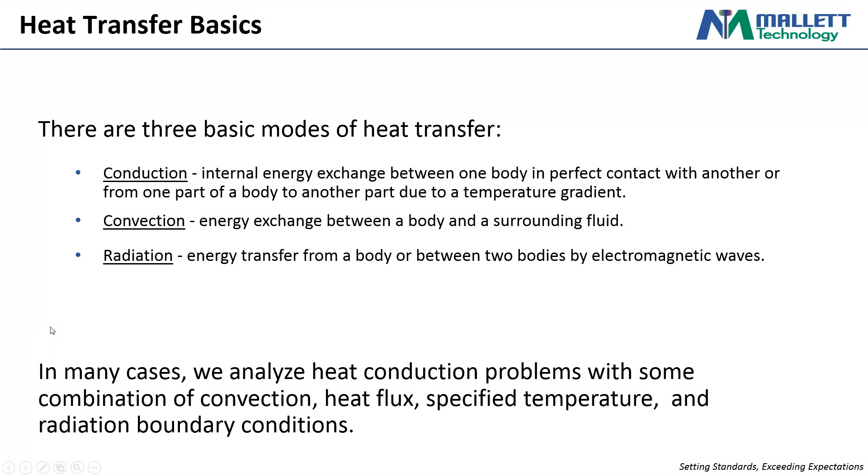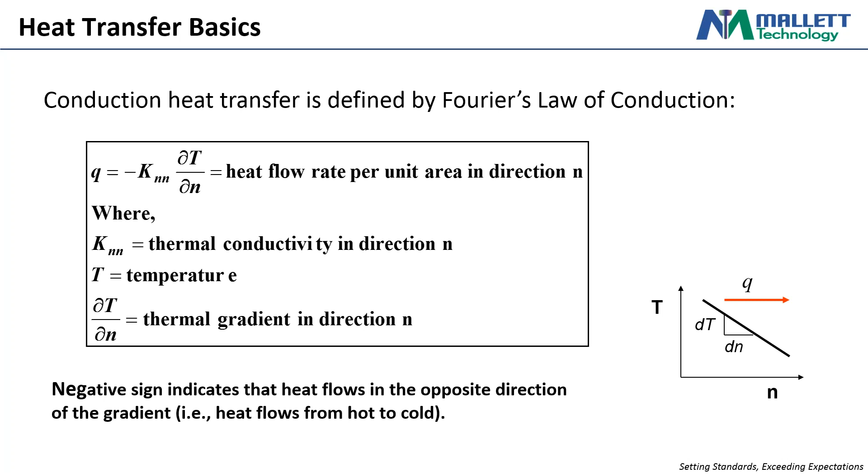So just some heat transfer basics. Conduction is defined as the thermal conductivity times essentially the change in temperature for a given direction. The one note here is heat transfer conduction flows from hot to cold. We can represent this as a thermal resistance, which is equivalent to length divided by the thermal conductivity of the material times area. This is oftentimes us simplifying a system to something equivalent, let's say an equivalent circuit diagram - this is how we calculate the resistance of a given material.

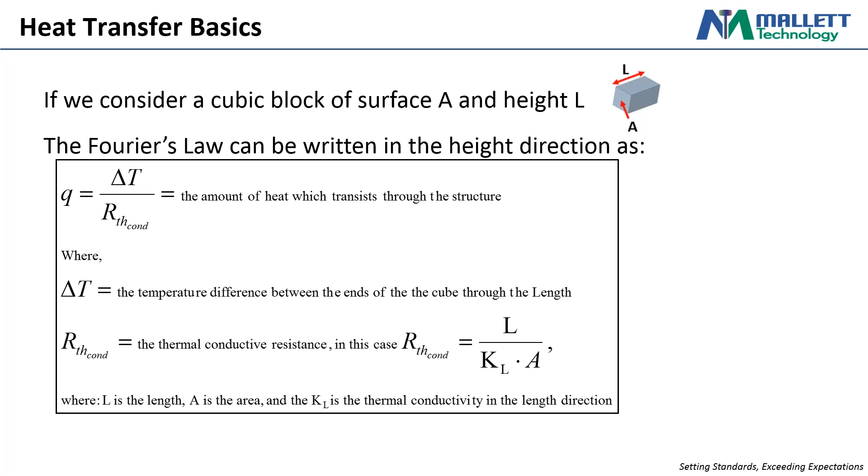And then we have convection. Convection is transfer between a body and a fluid.

The big piece here that can oftentimes be challenging to determine is the convective film coefficient, H. This is not a material property inherent to materials. This is a coefficient that depends on a number of factors.

If we're talking free convection, that's where you don't have forced air blowing over a system. Then it's dependent on the geometry, the orientation of the geometry, and the difference between the body temperature and the fluid temperature. There's also forced convection, which depends on the rate at which the fluid is being forced over the body. Once again, it depends on geometry and all these different factors.

So generally, a lot of the problems I'm dealing with on a regular basis are usually free convection. It's usually, let's say, an extrusion press that's just hot because it's having to make metal malleable. So oftentimes there I'm looking at what's the free convection on external surfaces, and there are ways to do this. ANSYS has tools that automatically calculate this based on a number of assumptions. But generally, I like to assume, if I'm dealing with natural convection, it's almost always going to have a

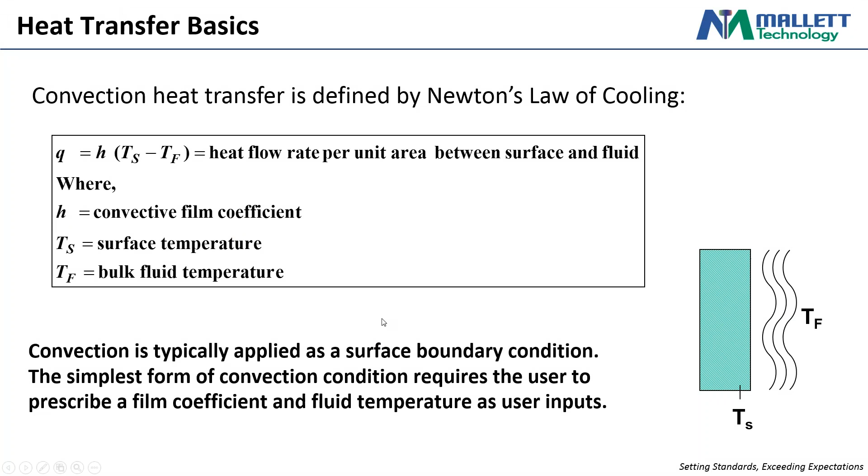And then last, radiation. Radiation is inherently nonlinear because of this T to the fourth term. So this is just radiation from a body. All bodies radiate heat.

So the key here is the Stefan Boltzmann constant, defined automatically in the software. Emissivity is what we as a user would define in the software. Everything else, ANSYS is automatically going to calculate. So when we're looking at emissivity, that's just the ability of the body to radiate energy well. Essentially, as you vary emissivity, the amount of heat that's radiated from a body is going to increase or decrease.

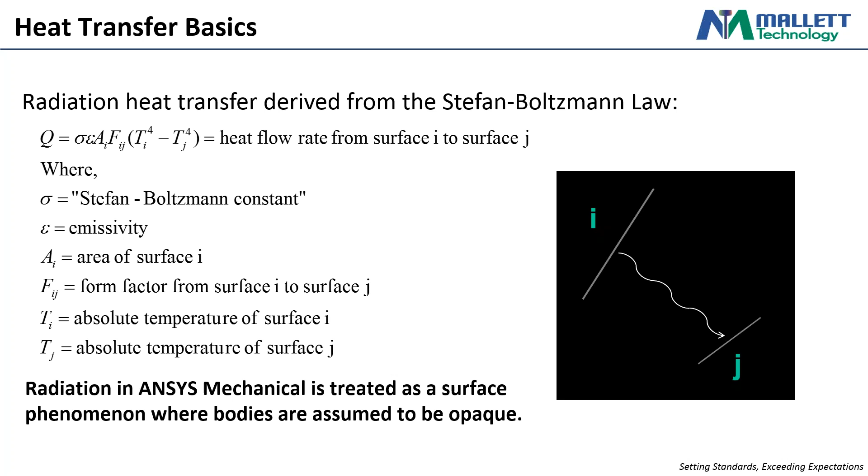ANSYS deals with radiation particularly on the surfaces of bodies. It's not necessarily interested in any internal behavior of the body, only on the surface or from surface to surface. I'll show you how to set this up. You can set it up between bodies in an enclosure, so bodies radiating to each other have different emissivities, radiating to external temperatures, all that stuff.

Okay, so just continuing on with the basics. From a first law of thermodynamics perspective, we know that to be able to solve a cohesive thermal problem, essentially our energy stored plus our energy in through any boundary plus energy out through any boundary plus the energy generated has to equal 0. If this does not hold true in your analysis setup, the analysis is not going to converge.

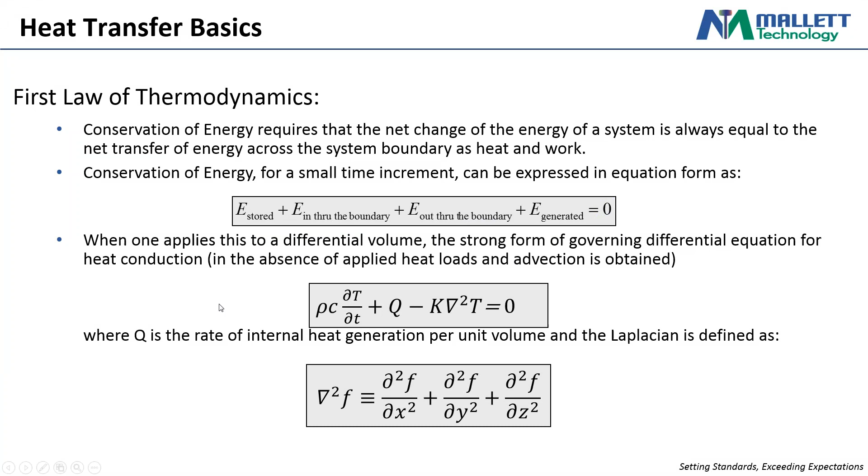I'm not going to go into more detailed math here. So potential problems of thermal analyses, this is really just generalizing the most often encountered. The first and foremost is potentially the simulation could just be poorly constrained.

So if we look at, let's say, a static structural simulation, we know that all translational and rotational degrees of freedom have to be constrained to solve that problem. So the degree of freedom that thermal analyses deal with is temperature. And so we have to have temperature constrained somewhere in the problem to allow that to be solved. If it's not constrained, that's essentially equivalent to rigid body motion.

So the big deal here is just make sure, if you're running a thermal analysis, that it is constrained. If you're having errors, check that it's constrained. If it's not, add a constraint, and a constraint doesn't necessarily have to be a set temperature. It could be, let's say, a heat flux out of the body, but there has to be some boundary that allows heat to leave the system. Because otherwise, you can imagine if you have heat generated in a system and there's no way to leave, the heat is going to continue to increase into infinity, and it's not going to be able to be solved.

The next potential problem is large thermal gradients or flux singularities. Let's say you had a point heat source, similar to a point load in a static structural simulation. At that point, you're going to get infinitely increasing temperatures as you refine the mesh.

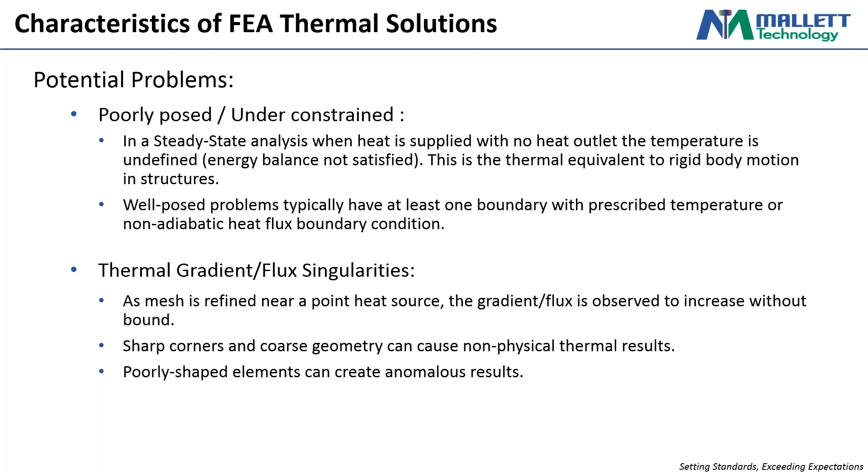Briefly, I'm going to touch on what geometry types are supported in thermal analyses within ANSYS. The long and short of it is all geometry types are supported, but there are a couple different considerations to make when dealing with certain geometry types.

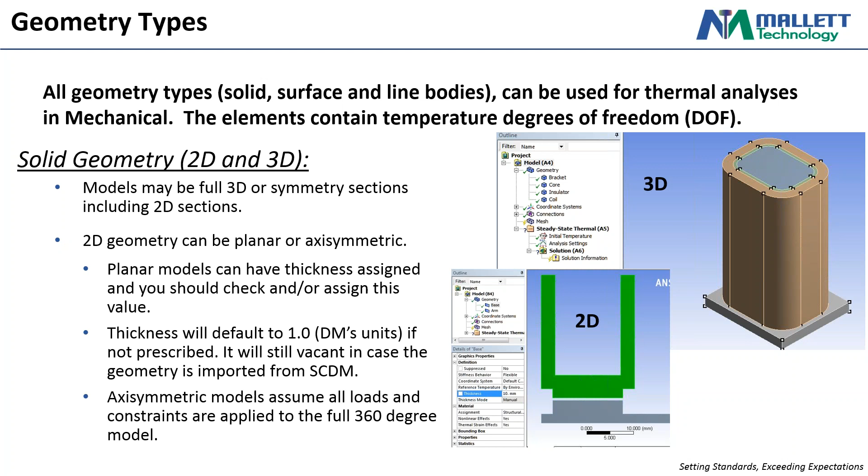Both 2D and 3D are supported with regards to shell elements. If you're using shell elements in a thermal analysis, the solver assumes a uniform temperature through the thickness of the shell body. You do get changing temperatures tangential to the shell body, but through thickness, the temperature is going to be constant.

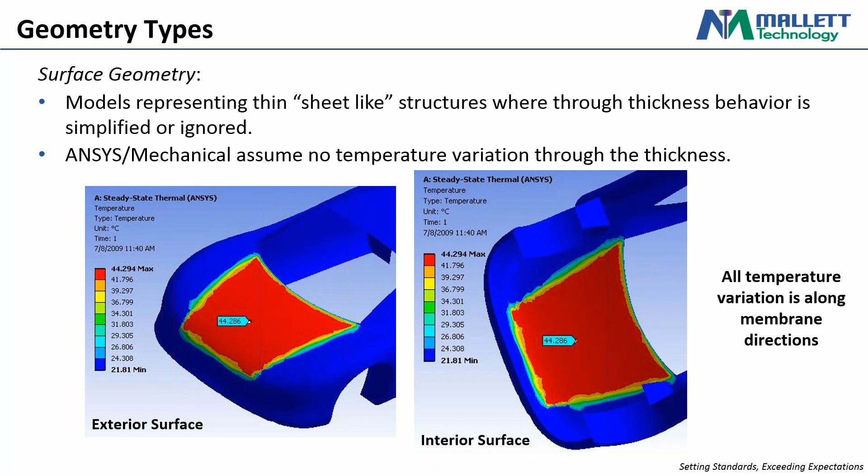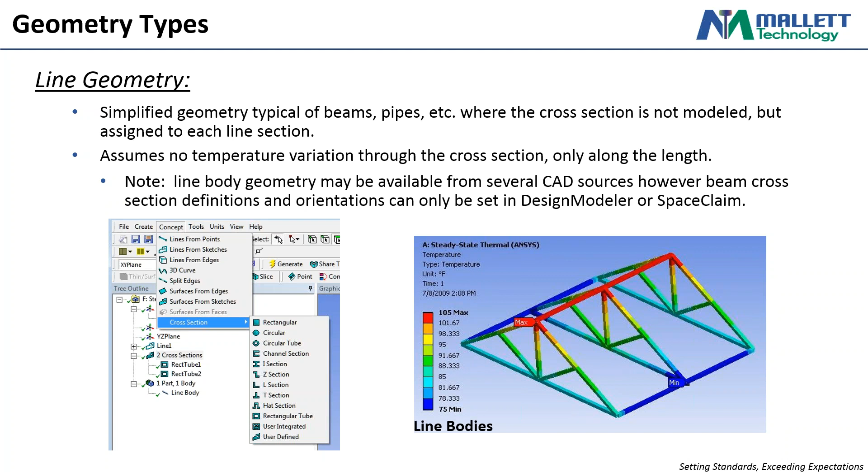The same is true for line geometry with section properties assigned, so beam or truss structures or anything along those lines. Essentially, you're going to get change in temperature along the line body, but not through the section of the body.

So then let me touch on how contact is dealt with in ANSYS's thermal analysis. Essentially, if something is in contact, contact is defined as inside or outside of the pinball. Inside of the pinball, it's in contact. Outside of the pinball, it's not in contact.

If it's not in contact, you're going to get no heat transfer taking place. If it's in contact, you're going to get conduction occurring, and depending on how you set it up, it could either be perfect conduction with no resistance at the contact, or you can insert some contact resistance to make the problem more realistic.

You can use any type of contact from bonded to no separation, rough, frictionless to frictional within the thermal analysis. Generally, the reason you'd see these types of contacts included is if you're leveraging the exact same model setup for a thermal analysis as a structural analysis, then you might want to use frictionless or frictional or rough in place of bonded.

If I have a thermal analysis that I'm not directly using in a structural analysis, there's essentially no need to use any of the last three. Usually you just use bonded no separation because you're essentially just telling the solver, hey, there's conduction at this interface. It's just when you want to share a model setup that you'd use more nonlinear contacts.

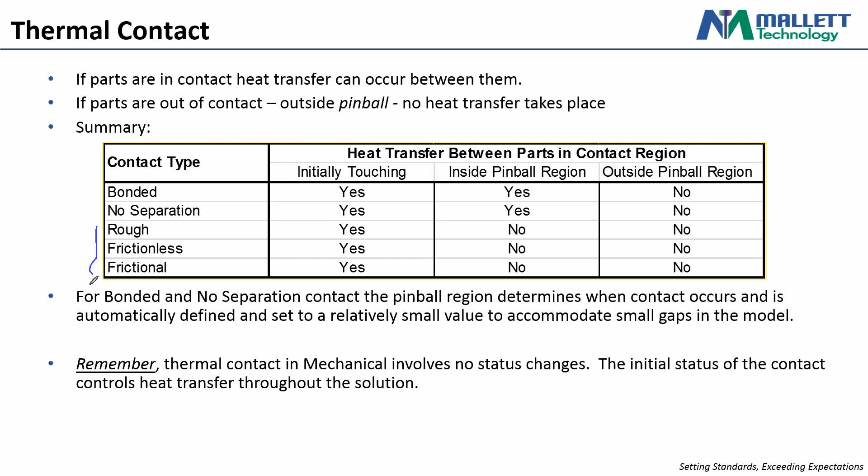So this is what I mentioned earlier: whether or not there's conduction just depends on the size of the pinball. As we get away from the pinball, if the geometry is further apart than the pinball size, we're not going to get conduction between these nodes. But when it's within the pinball size, we will get conduction in this area.

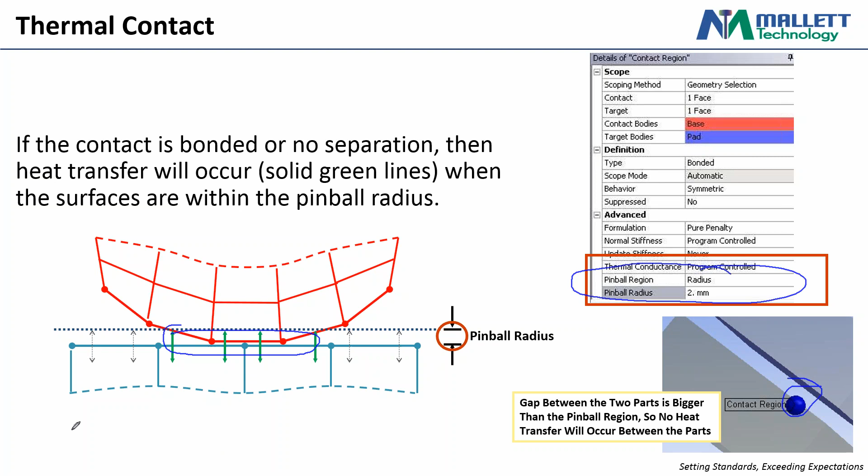The pinball is always automatically generated. If you want better control of your model, you can go in and manually specify the pinball, and then you get this blue sphere that shows you the pinball size that you're recommending, or telling the solver to use.

Okay, so from thermal contact resistance. Thermal contact resistance is pretty common. It's a safe assumption for a welded contact not to have thermal contact resistance because you're essentially joining material together, or if there is resistance at that weld, it should be pretty negligible. But everywhere else, it's fairly readily assumed that there's going to be some amount of resistance, right?

Resistance can be from a number of factors. If you don't have a flat surface, you're not going to have perfect conduction across that interface because conduction will occur across the peaks of each side of the interface. Same rationale for the finish. Oxides potentially could induce a surface material that is more resistant to conduction. If you have fluids in the center, that's another thing to conduct heat through. Contact pressure - higher contact pressure, you're going to have better conduction; less contact pressure, lower conduction. You can imagine if I have an infinite amount of pressure at an interface, that's essentially a uniform material at that point, because you're compressing the material until it's perfectly flat and perfectly meshed with the opposing material.

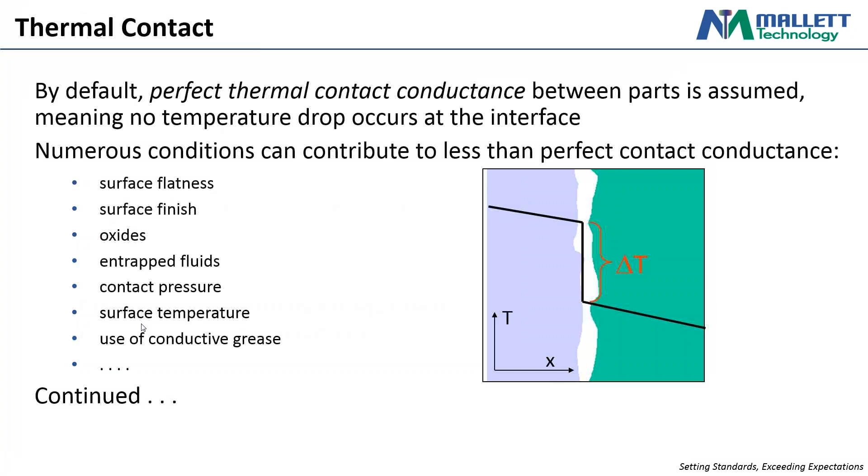If you use the bonded contact setup, there is a thermal conductance value that you can specify for a particular bond. This is essentially the same as thermal contact resistance, just requires you to modify in terms of invert and divide by that area to get thermal resistance from the thermal contact conductance.

The one note here is to have this thermal contact conductance value available, you cannot use an MPC contact formulation. MPC is similar to shared nodes, and essentially it creates a formula saying that the two different sides of the contact must change together. So there's no option there to have a delta T, or temperature drop, across the interface. Just make sure if you're trying to find this, you're not trying to use MPC contacts.

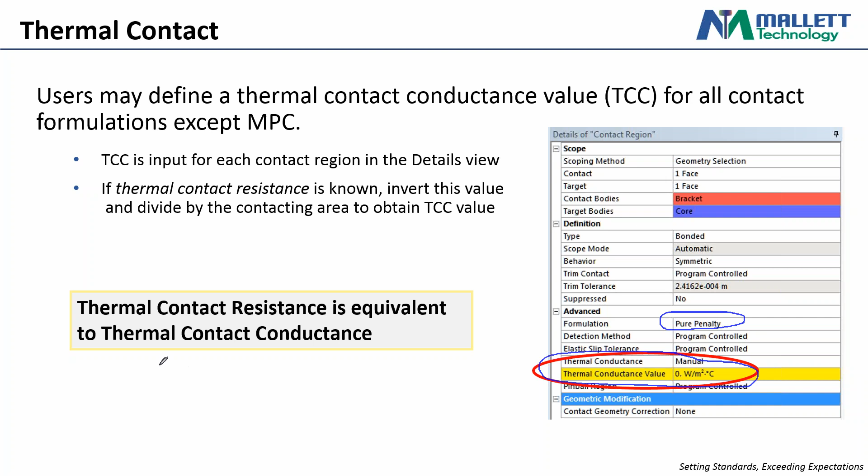Okay. So those are all the basic slides, and then I set up a couple examples that I just wanted to walk through in terms of the setup and then potential considerations.

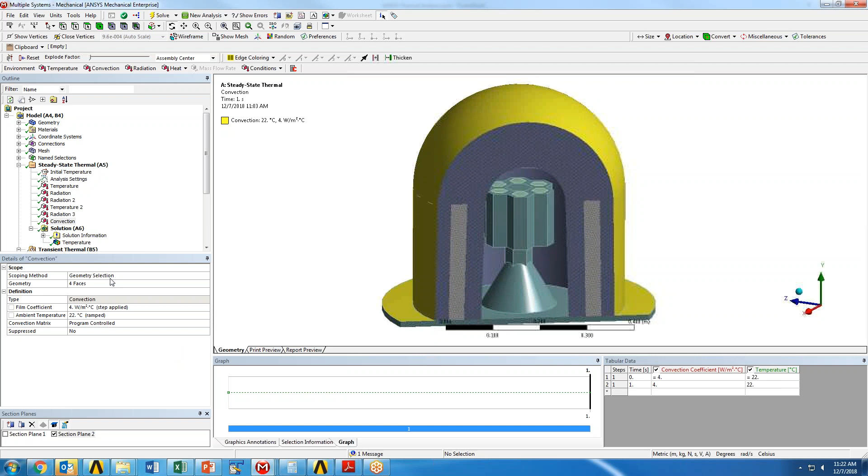So let me look at the workbench workflow first. With any thermal analysis, you can always transfer those results into structural analysis. It's really easy, really straightforward. All it looks like is you have your thermal analysis - you're going to grab this solution branch and then drag and drop it to the setup.

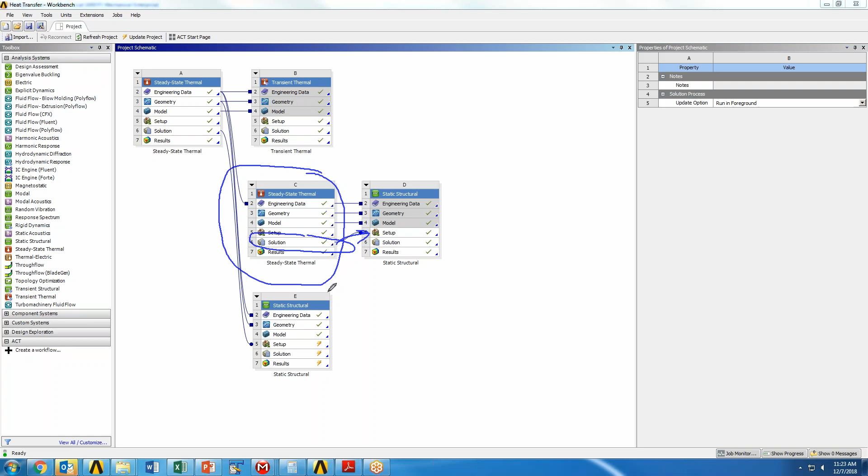What that's going to do is allow the structural simulation to say, hey, I have some load coming in, I need to be able to import the body temperature that's specified. So you can import that, and what the structural solver is going to say is, okay, I have this temperature distribution on my body, and as long as you have a material property value of coefficient of thermal expansion for each material in the domain - which you have to have if you're going to have temperature or thermal loads applied - it can use the thermal expansion coefficient values to calculate resultant stresses from the applied temperature.

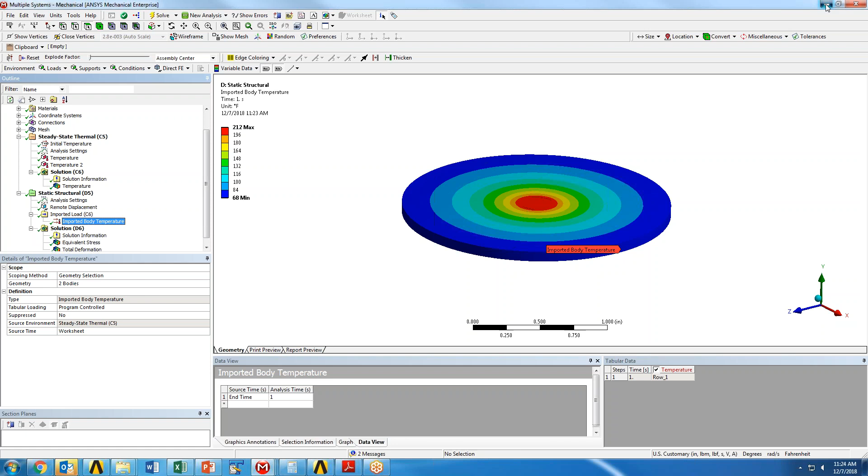Okay, and you don't have to fully share models here. I'll show you a little bit later that I have similar geometry but completely different meshes, and you can still transfer thermal loads from a steady state or transient thermal analysis to a static structural or transient structural analysis.

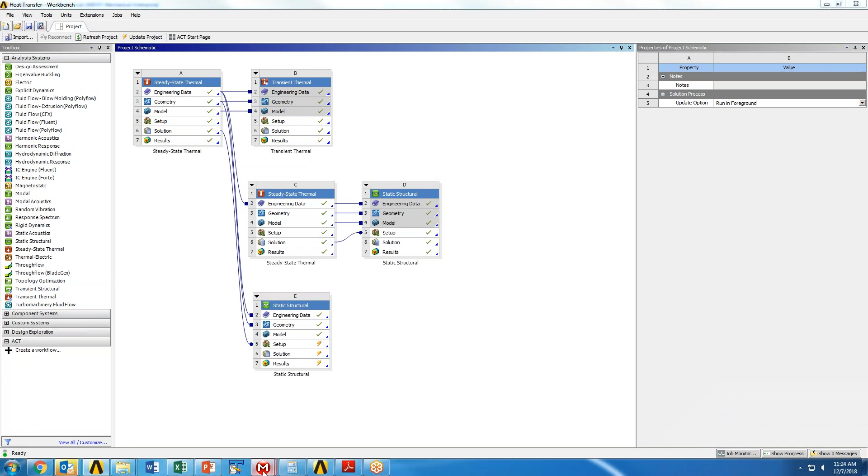So this is just a dummy analysis I set up. This geometry is essentially meaningless. You can see I essentially just have some weird looking standing body inside a dome. There is mica insulated material on a portion of the dome, while the rest is just structural steel. And then I have just a plate on the bottom that everything's resting on.

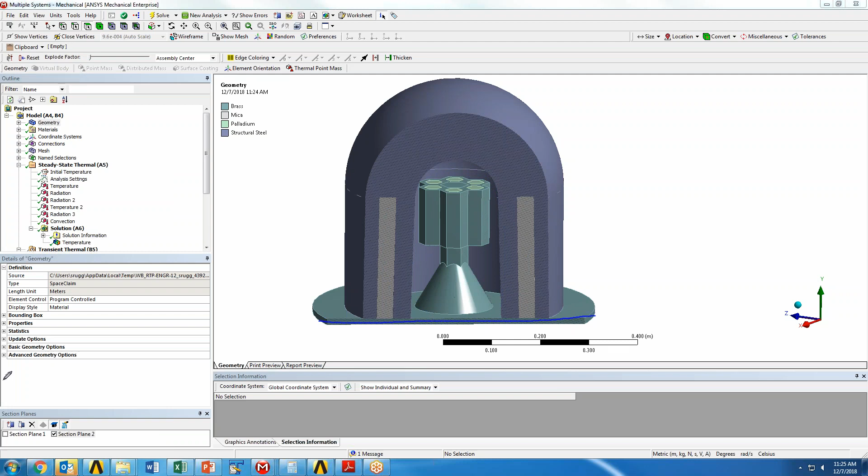So the one thing I'll call out before going into applied boundary conditions is another option, right? So you have two options when talking about conductance and getting heat to transfer across interfaces. The first is kind of what we've talked about in the slides, which is you can use contacts to specify two bodies transfer heat to one another.

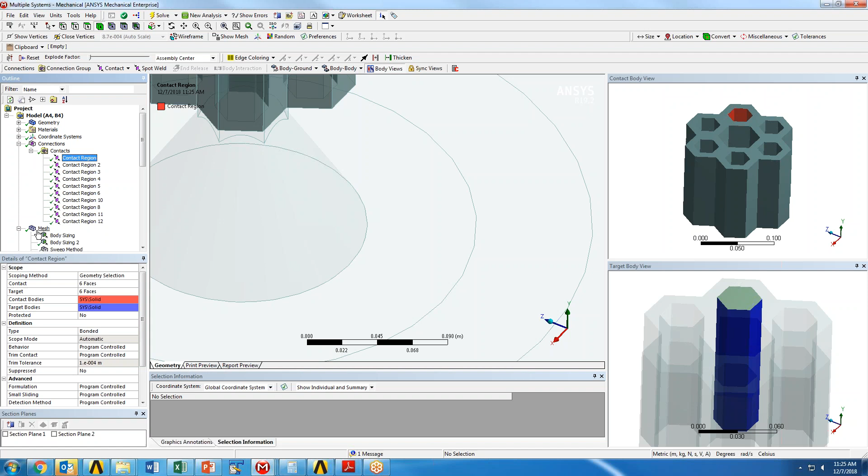The second option is to use shared topology, let's say within SpaceClaim. Shared topology tells ANSYS that when it meshes the interfaces, it has to use shared nodes across that interface, which is what I did at this interface between this cone and the plate. You can see all those nodes are shared.

This essentially allows you to get really good temperature distribution across an interface. However, you cannot at that point specify any type of contact resistance, so that's the drawback. But if you're convinced that you have really good conduction, then generally I recommend shared topology as much as possible. Partially just because it simplifies your model, it simplifies the structure tree, and generally something simpler, there's less risk of error.

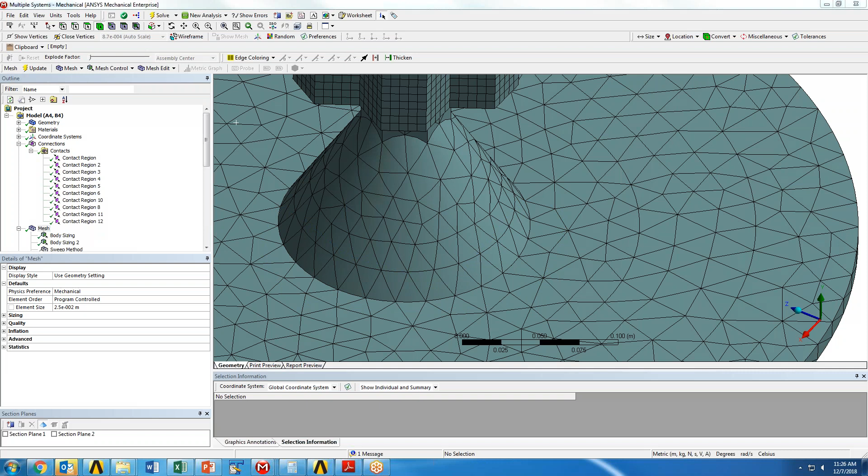So if we just step right into the boundary conditions, so you can always apply... let me look. So a number of options, right? You can apply temperature to a body.

If you apply temperature, the solver will maintain that temperature. It'll either input the amount of heat it needs to stay at the temperature, or it will remove the amount of heat that needs to stay at that temperature.

Convection, right? This is heat transfer between body and fluid. Usually, in a lot of problems, it's just transferring to ambient air.

Radiation, if you have hot enough bodies, this will become a dominant term, right? That T to the fourth does dominate if you have large temperature differentials at hot temperatures. So you can specify radiation.

You specify heat flow. So heat flow is just watts across a boundary, right? Whereas heat flux would be watts per meter squared. You specify internal heat generation, so this is watts per meter cubed, or perfectly insulated.

The perfectly insulated essentially is an adiabatic condition. If you do not specify a contact in an ANSYS thermal analysis, that's equivalent to an adiabatic condition. ANSYS does not assume that heat transfers across boundaries. It only will transfer heat exactly where you tell it.

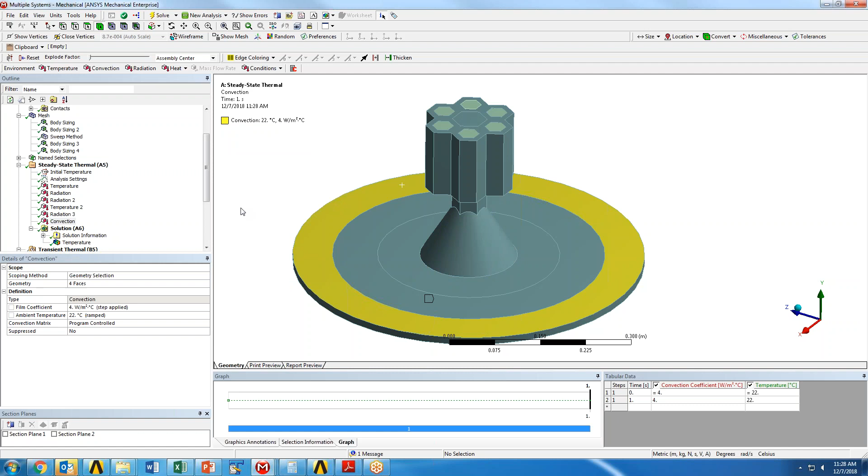So if I left the problem set up as it is now, I would have all these bodies radiate to one another, right? So I could have radiation between these surfaces, radiation between these surfaces, et cetera, anything within the field of view. However, I wanted to specify radiation between those surfaces as well as between those surfaces in the interior of this dome, right? But my dome has a different emissivity to essentially generate another radiation boundary condition.

And then I specify its own emissivity, but I specify that it's also for enclosure 1. So then when the solver goes to generate and set up the problem, it's essentially going to say, hey, we need to grab both of these radiation conditions, combine them together, and radiate between all the surfaces specified within.

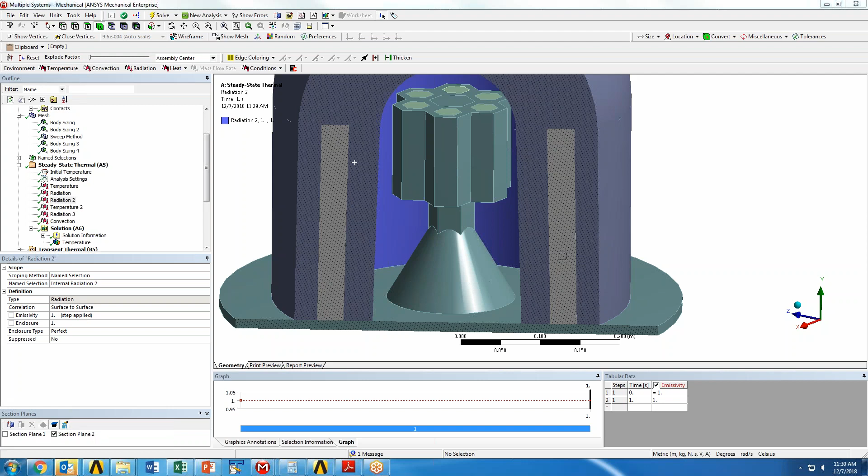Then I have a temperature condition on the exterior edge. This is a cold temperature, so essentially it's going to be drawing heat out. It's a heat sink. I have radiation to the external air, right? And you can specify ambient temperature however you want. And then I have convection to the ambient air on all my external surfaces.

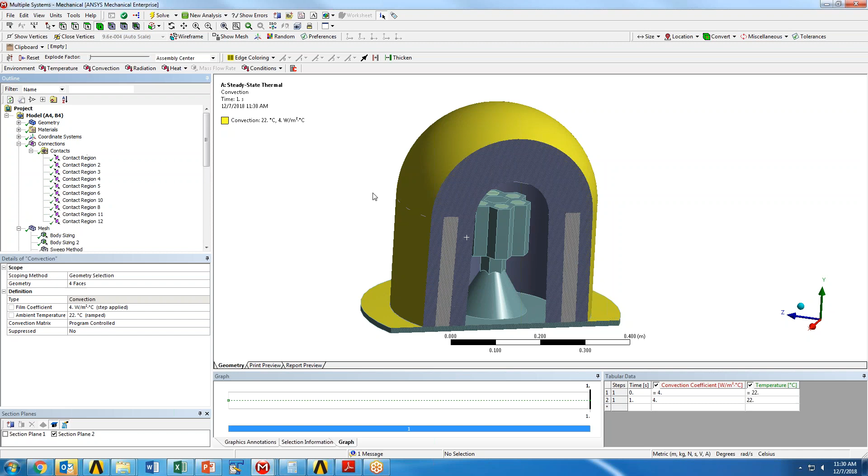The one other thing I set up is for the contact between the tall rod holding up the rest of this hexagonal internal body, I do have a specified thermal resistance, or thermal contact conductance, of 500 watts per meter squared degrees C.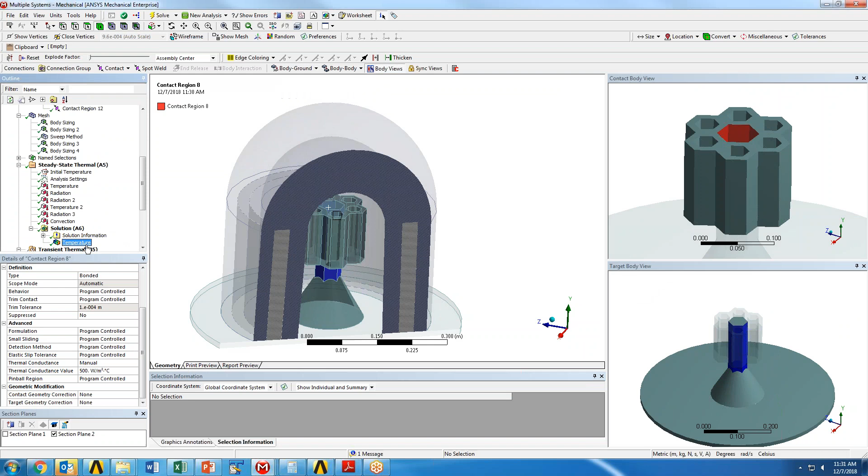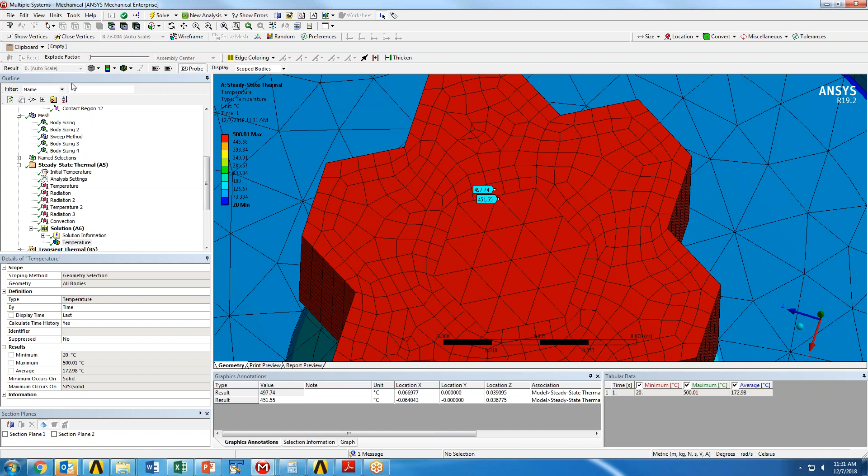And so what you're going to see is as a result of that specification, if I look at my temperature profile at that interface, you can see I have my specified 500, and then you can see it immediately drops across the interface, right? 500 to essentially immediately 450. And I can make that a little bit more evident.

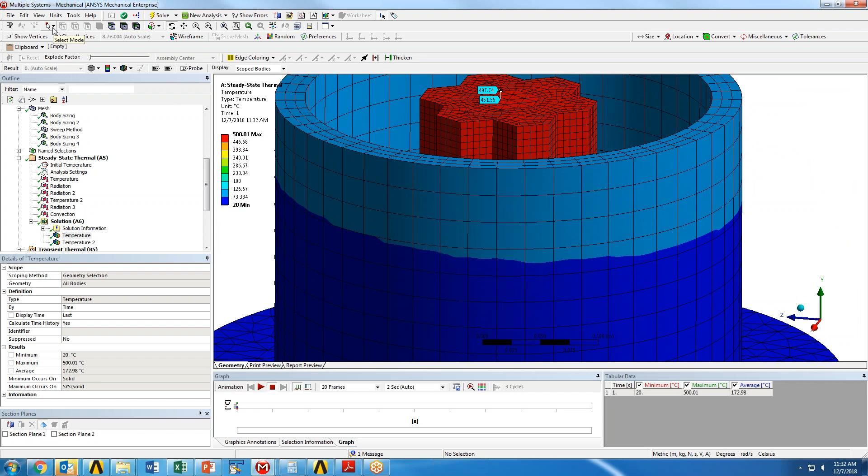So you can see that immediate temperature drop, right? Fully red to 450. That's a result of the thermal conductance value. Whereas where I have perfect conductance, which is all the other contacts, or my shared topology, I get a perfect gradient across all boundaries, right? There's no temperature drop here. It's nice and consistent, as we'd expect.

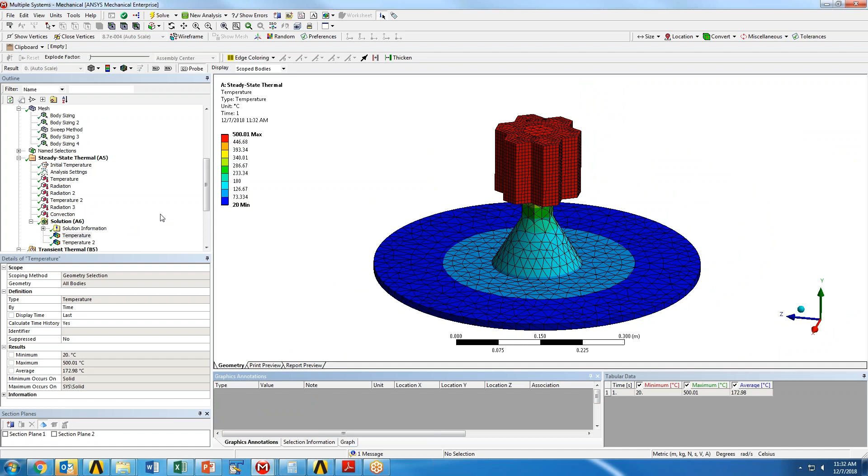Okay, so the one thing I did want to show is if you don't want to go through the hassle of using hand calculated values to come up with a convection coefficient, ANSYS does offer a couple of assumed formulaic guides to what this convection coefficient may be. To look at those, all you do is click on film coefficient. You can hit import temperature dependent, and then at this lower side you have a couple of assumed formulas and assumed curves for different geometry setups. So you can see you have a horizontal cylinder, vertical planes, stagnant water, etc. In this case, I'm going to say I have a vertical plane.

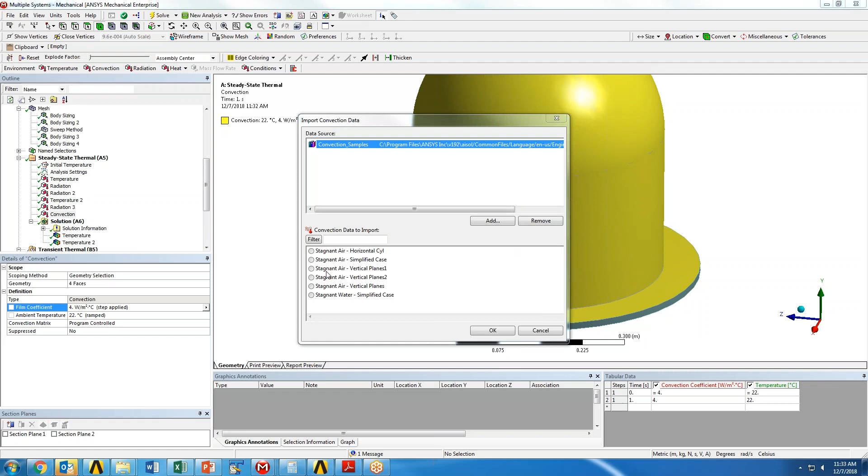What that does is essentially create a nonlinear curve where I'm looking at convection coefficient as a function of temperature. This now immediately makes this problem nonlinear - it was already nonlinear because of the radiation, but if you did not have radiation, this problem now immediately becomes a nonlinear problem.

And you can have the convection coefficient vary by a number of things, by the average film temperature. You do the difference of surface and bulk temperature. Bulk temperature would be the air. You can just do the surface, just the bulk, etc.

This is helpful, but what you may see is for a very large range of temperatures - this is almost 0 degrees C to 1,000 degrees C - my convection coefficient a little bit more than doubles, from roughly 4 watts per meter squared degrees C to 8. And what you'd often find is if you run cases with 4 and then you run cases with 8, you may find there's very little difference in the resulting temperature distribution, in which case maybe you decide that the additional heartache generated as a result of this being more nonlinear and having to iterate along this curve, maybe it's not worth it, right?

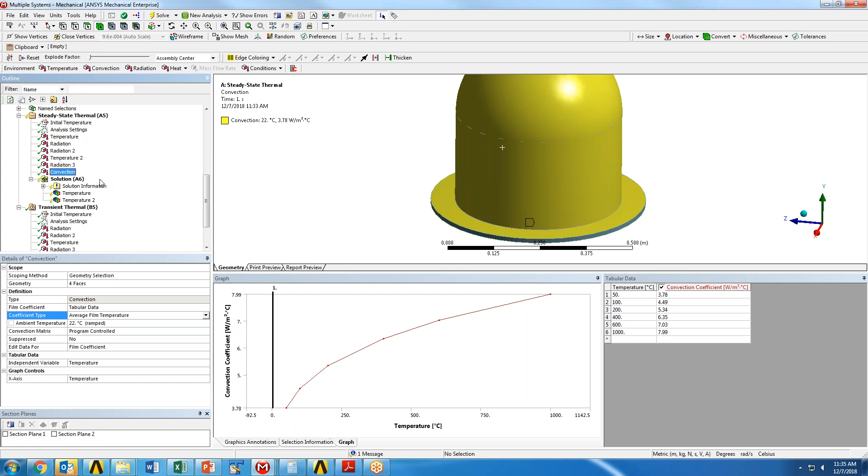So the biggest difference between a steady state thermal analysis and a transient thermal analysis is for the steady state, you have to have a heat sink. You can't infinitely generate heat within one body because your temperature is going to rise infinitely and you're not going to be able to solve it from a steady state perspective. For a transient thermal analysis, you do not need to have a heat sink, since you're looking at it from a time perspective, the solver is essentially going to calculate that infinite rise in temperature. So it's not required, right?

So here I have a similar analysis, and the big difference with the transient thermal analysis is you're dealing in time. And so you just need to specify in your load steps what time you're looking at. In this case, I have only one load step, and it's going from 0 to 1,000 seconds.

And I'm allowing, in general, and I would recommend this if you're doing transient thermal analyses, oftentimes the automatic time stepping algorithm is very beneficial in solving the problem in the most efficient manner possible. So it's highly recommended - take advantage of it. You can certainly try to do it at a fixed time step and see what the difference is, but just be warned, it may take a while depending on how you set it up.

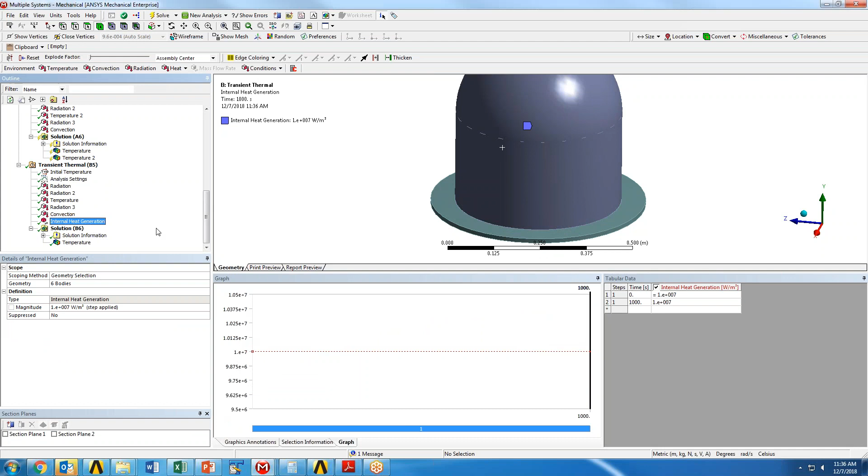So really the big difference here is you just have to specify real time, and oftentimes in this case, rather than a set temperature, I have internal heat generation specified on these tubes. So I'm essentially injecting a certain amount of watts into the system, a heat rate into the system, which is going to slowly heat it up.

If I had a set temperature, typically, depending on how I apply it, it may be harder to solve. If I apply the temperature in a step change, from a transient thermal perspective, that's much harder to solve and converge to than a much more gradual temperature change. You could have a very steep gradual change, but as long as it's not a step, and your time steps are small enough to capture that gradual rise, it can be solved. But a strict delta in temperature is incredibly challenging to converge.

Okay, so let me pause for a sec. I've jumped between a lot of different topics, a lot of different things. Are there any questions with any of the things I've talked about?

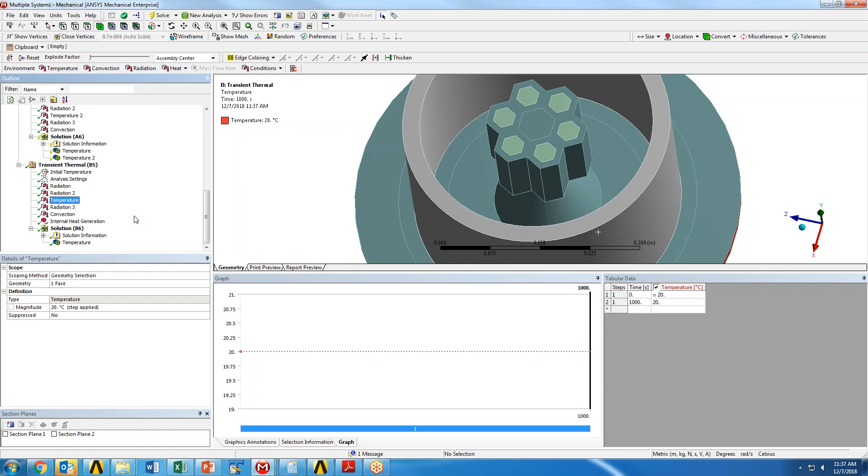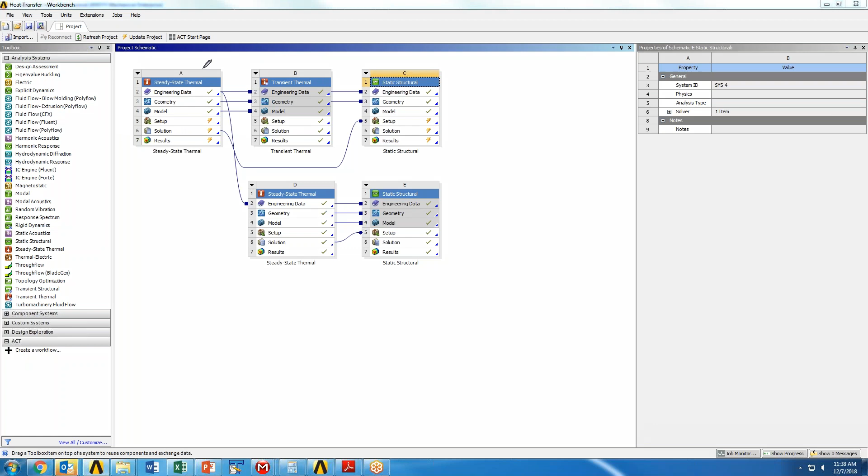Okay, so the one other thing I'm going to cover is importing loads. So I mentioned here earlier, let me make this a little more obvious. You can see here I have a steady state thermal system, and I'm sharing my engineering data and geometry with that system, and then I'm importing my thermal load.

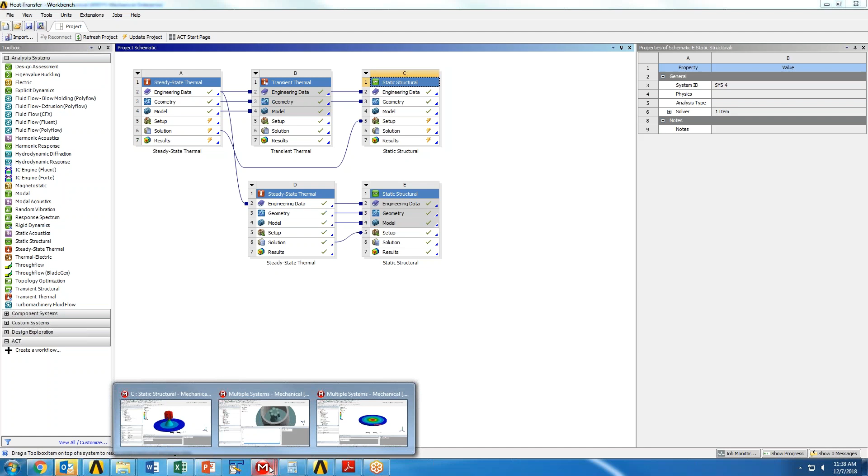Sometimes you may encounter problems where you want either different contacts or different mesh criteria for a given model, so maybe you won't share the mesh and contacts and all that data between the two. In this case, I decided I wanted a much finer mesh on the body than I did in my thermal analysis, and additionally, there were certain pieces of bodies that I wasn't interested in - this could be if, for a thermal analysis, I am physically representing insulation.

When I'm bringing that thermal data to a structural analysis, usually, depending on the insulation you're dealing with, it's not going to have a large stiffness, it's not going to have a large impact on the overall structural response of a system. So generally it's not beneficial to represent insulation in a structural analysis.

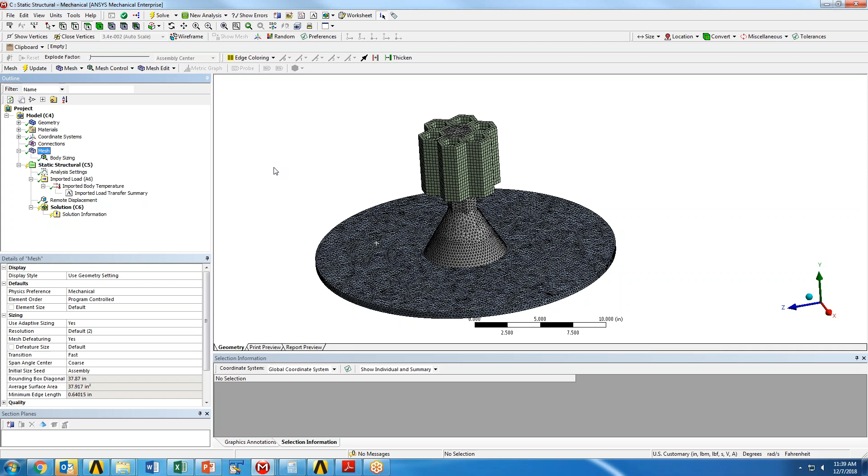So in that case, I wouldn't share the mesh, and when I come to my static structural or transient structural analysis, I would actually suppress that body, and then when I'm importing my load, I can specify I want to import loads on only the specified bodies. So here there's 4 bodies here.

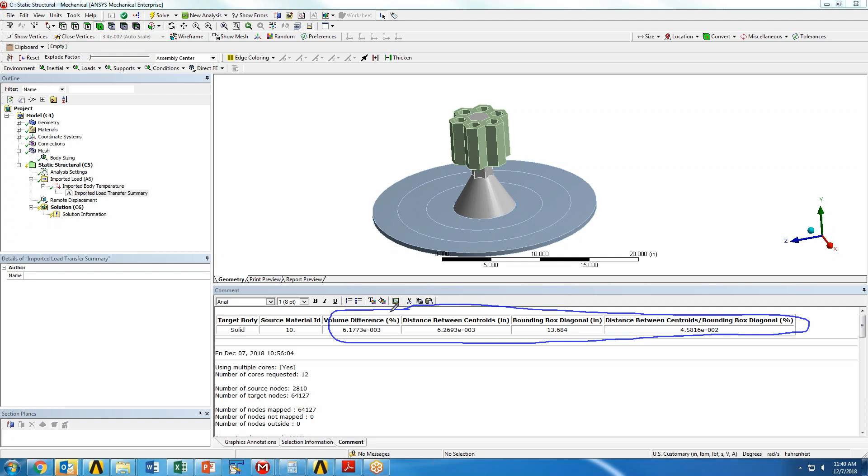This solver comes in, looks, says okay, based on a number of factors - it's looking at volume, distance between centroids, bounding box, and a combination of the two. As long as these things match to within a certain degree, it's going to transfer the temperatures to that body. And if I have different mesh sizing, which in this case I do, it's going to interpolate where the temperature should be at each node of each element based on the distribution calculated in the thermal analysis.

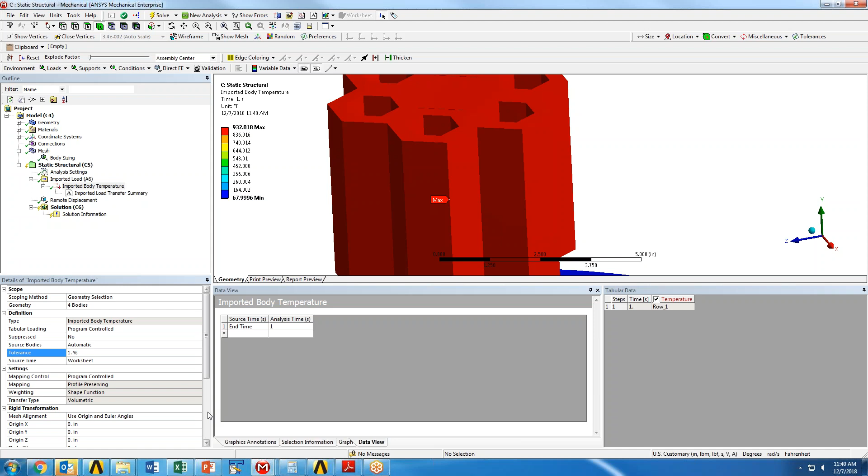So if you're ever trying to import temperatures in a case like this and you're having issues, one thing you could do is increase the tolerance. This will allow it a little bit more freedom in terms of figuring out which body to apply the temperature to. And if you're continuing to have problems, I would dig a little deeper into the imported load transfer summary to see really what volume differences it's dealing with, what differences it's actually seeing between the bodies you're trying to transfer the temperature profile between.

Okay, so I'm going to stop there because that's a whole lot of information over a whole broad spectrum of potential use cases. So for anyone on the phone, is there any questions with anything I covered?

And the chat box has no questions either, Steve.